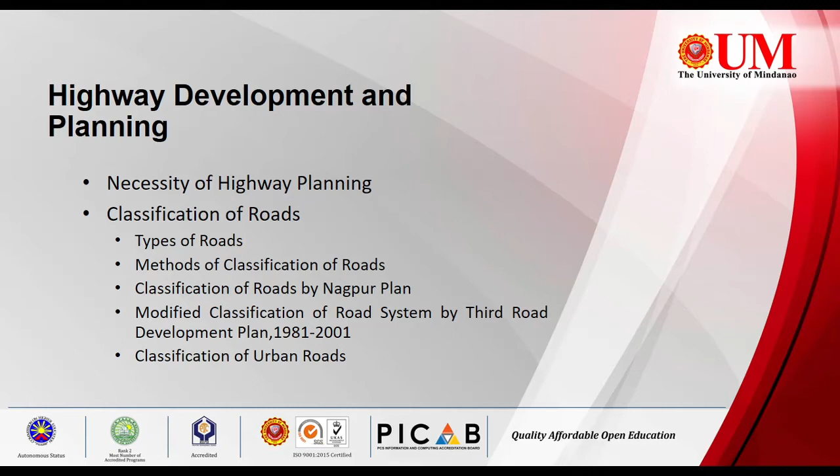So first, we'll be going to discuss necessity of highway planning. Highway planning is also a necessary component of highway construction. In today's era, planning is a needed requirement before making it into reality. Planning is necessary especially when the budget of certain projects is limited. This is the time that we are able to adjust the cost of the project and open it for any possible upgrades in the future.

So highway planning is necessary because every country is developing. Like here in the Philippines, there are places that are developing and highway planning is a must in order to prepare for the future. This just means that we need to prepare everything before making it into reality so that we can avoid unnecessary mistakes and failures in the construction of highways or roads.

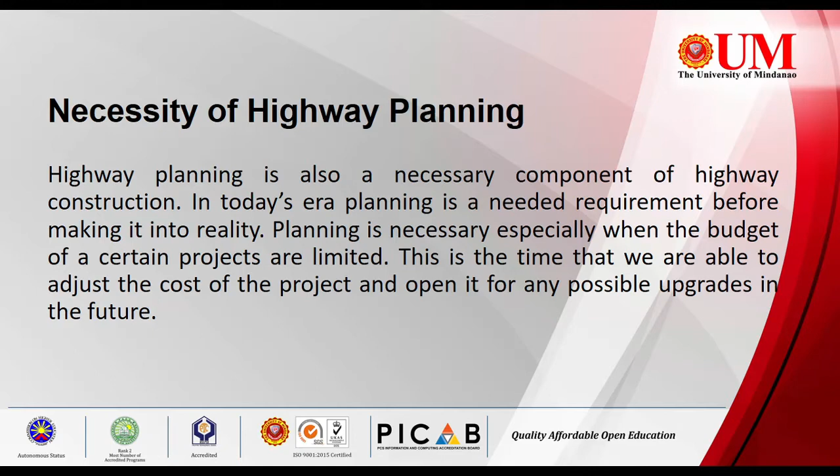We cannot deny the fact that there will always be mistakes in making roads, but with the help of highway planning, we can lessen them, especially when the budget is limited. Failures are also limited. So, in order to fulfill these objectives, highway planning has principles to be kept in mind. First, to design a road network that would allow for effective and safe traffic operation at a low cost. The expenses of pavement layer creation, maintenance, and replacement as well as vehicle operation costs must all be taken into account.

This just states that when we design a road network, we need to know everything that is affected by this network. That includes the cost of operation and how it will benefit the traffic. It also includes the expenses for future improvements and maintenance because as years go by, roads are prone to damage and there is a need to maintain them because they will be used by the public.

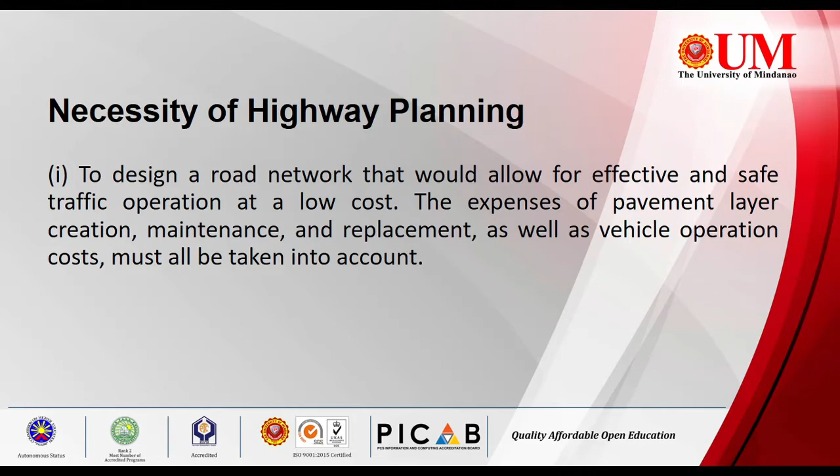Next is to determine the road system and lengths of various kinds of roads that would give the most utility and could be built within the planned period's available resources. This just states that there is a need to determine the roads and lengths of different roads in order to classify which would be needed to develop according to the plans that have been made, also dependent on the available resources.

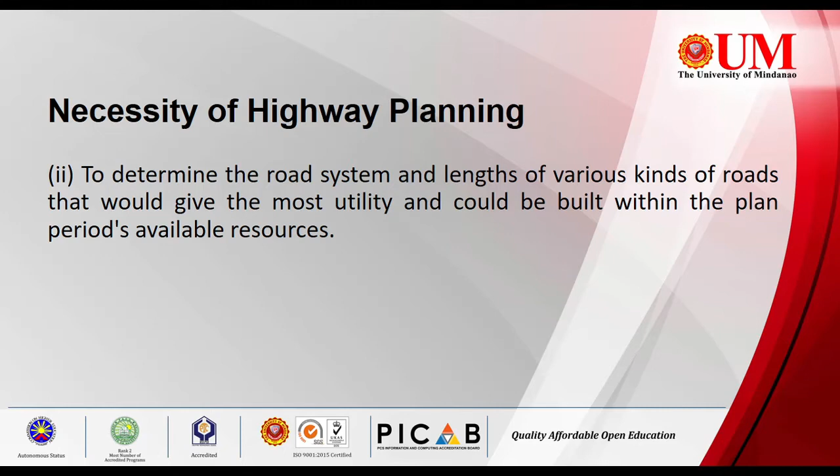Third is, for a given design era, planning for future development and projected traffic demands. This just states that future developments depend on what is already planned in terms of traffic demands, with proper adjustments also. We can see that there are a lot of areas that have been constructed before others. That is because the engineers who plan them take into account what could be the better solution in every situation of traffic demand. It will all depend on what is planned and what would benefit the many.

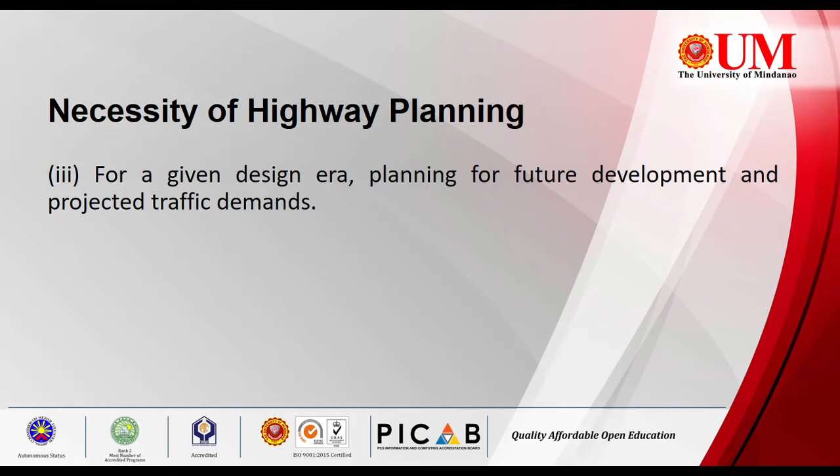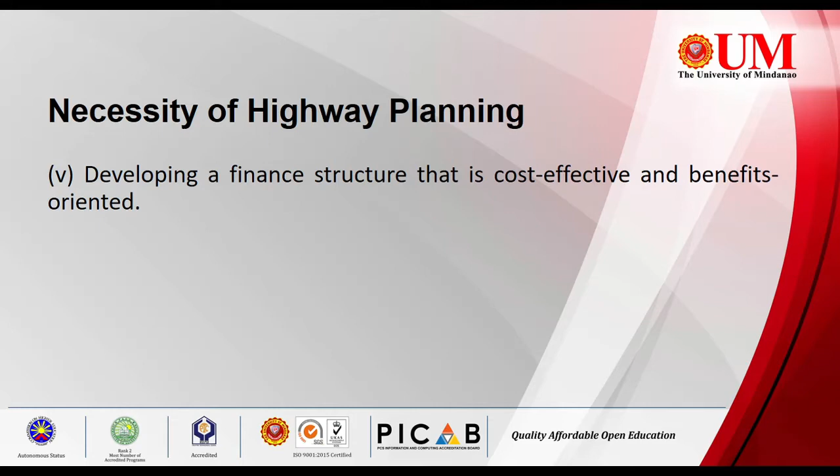Lastly would be developing a finance structure that is cost effective and benefits oriented. Like any other project, the cost of construction must be taken into consideration so that it is effective and benefits the public, because it would be for public use.

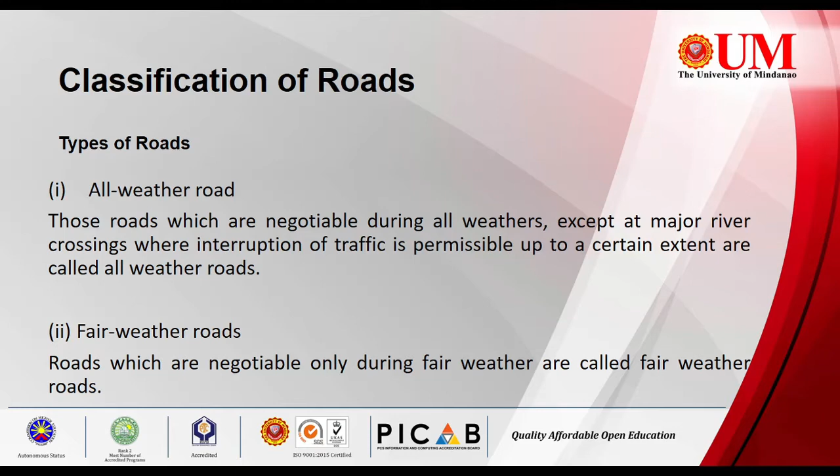The next topic would be types of roads. The different types of roads are classified into categories depending on whether they can be used during different seasons of the year. First is all-weather roads. Roads which are negotiable during all weathers, except at major river crossings where interruption of traffic is permissible up to a certain extent, are called all-weather roads. The other one would be fair weather roads. Roads which are negotiable only during fair weather are called fair weather roads.

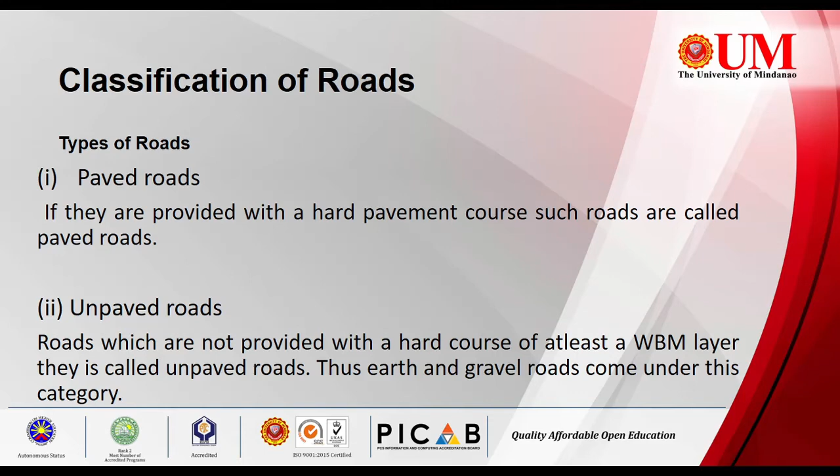Next, based on the type of carriageway or road pavement, roads are classified as paved roads and unpaved roads. Roads provided with a hard pavement course are called paved roads. Roads which are not provided with a hard course of at least a WBM layer are called unpaved roads. Thus, earth and gravel roads come under this category. Next, based on the type of pavement surfacing provided, the road types are divided into two as well.

These are surface roads and unsurfaced roads. Roads which are provided with a bituminous or cement concreting surface are called surface roads. Roads which are not provided with bituminous or cement concreting surface are called unsurfaced roads.

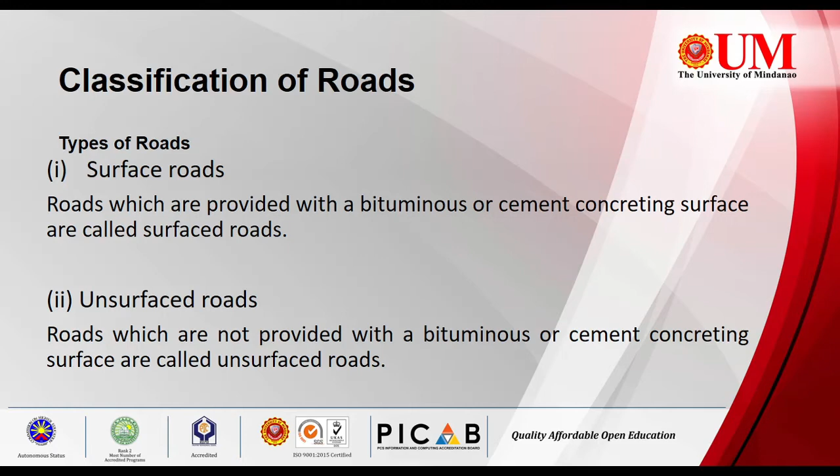Next would be methods of classification of roads. The roads will be generally classified on the following basis. So first would be traffic volume, next would be load transported or tonnage, and lastly would be location and function.

So first for the traffic volume, the types of roads are categorized by how many vehicles they have per day. So very heavy traffic roads are above 600, while the lowest would be light traffic roads below 70. So for load transported or tonnage, first very heavy traffic roads are above 1,524 per day, and the lowest would be 508 for the light traffic roads.

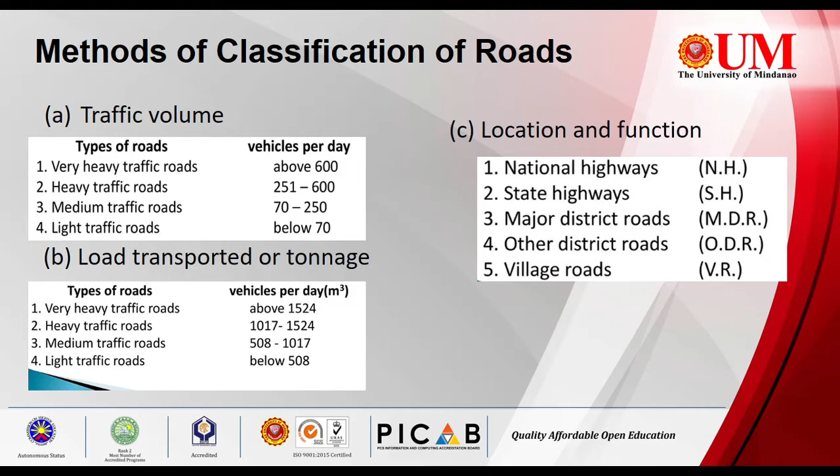So third, location and function. The classification based on location and function should be therefore a more acceptable classification for a country as they may be defined clearly. The Nagpur Road Plan classified roads in India based on location and function into the following five categories described. The first road development plan, or Nagpur Plan, was formulated in 1943.

Next is state highways. State highways are highways that connect with the national highways of neighboring states, district headquarters, and significant cities. State highways are usually roads that link important cities, towns, and district headquarters within the state and connect them to national highways or state highways of neighboring states.

Third would be major district roads or MDR. One of the most significant routes inside the area is the principal district roadways. It supports the manufacturing and market region by linking these locations to one another and to the main roadway. Major district roads are important roads within the district, serving areas of production and markets and connecting these with each other or with the main highways.

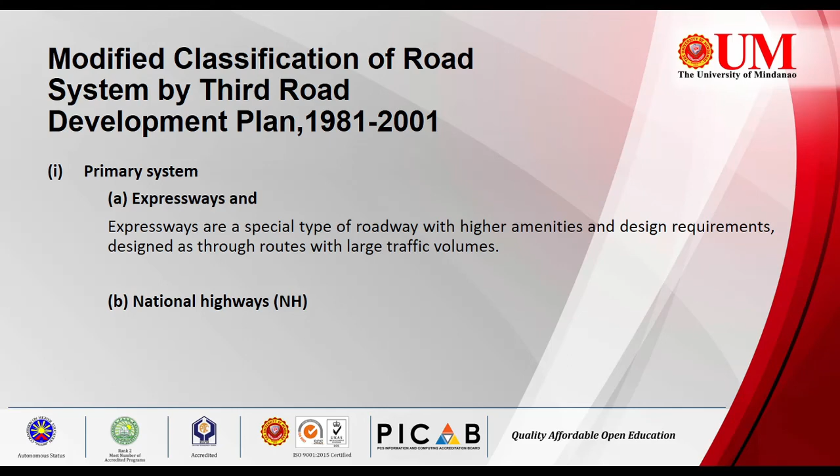So just like here in the Philippines, we have NLEX and SLEX expressways. They are superior type of highways and are designed for high speeds, high traffic volume, and safety. They are generally provided with grade separations at intersections, and parking, loading, and unloading of goods, and pedestrian traffic are not allowed in expressways. It only has entrance and exit. And the other one will be national highways, as I said earlier.

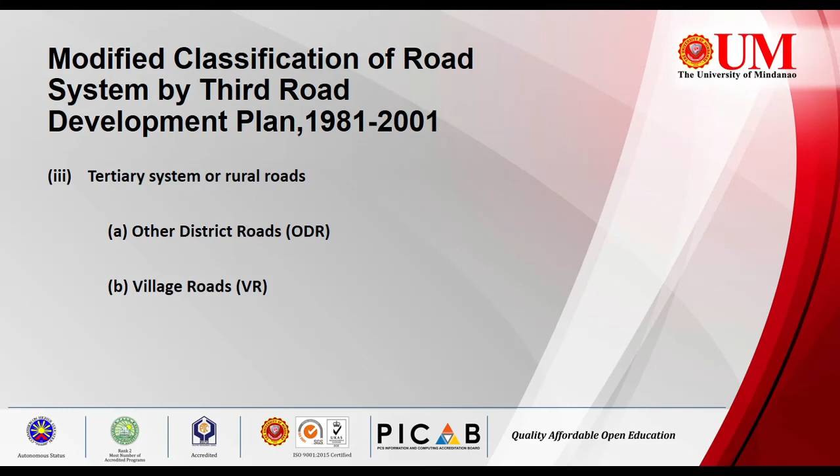Secondary systems are the state highways and major district roads. Tertiary systems or rural roads are the other district roads and village roads. So the last topic would be classification of urban roads. So first is arterial roads. So these are roads that are for the heavy and important traffic inside the city, usually along the expressway, serving as principal network of traffic flow.

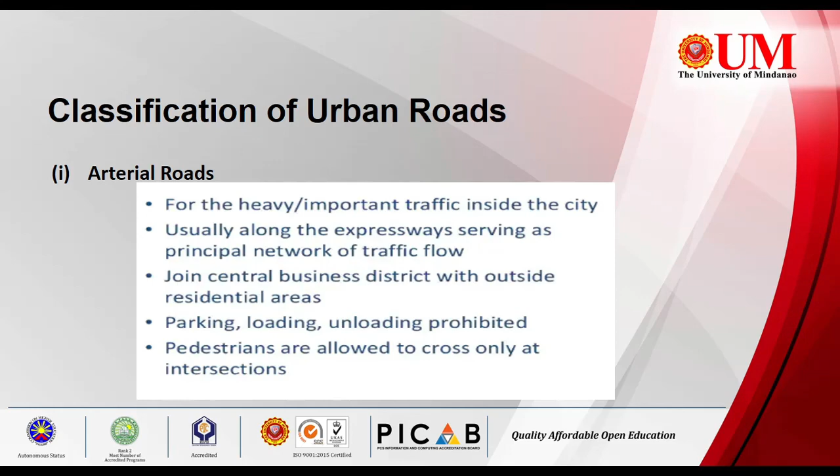Parking, loading, and unloading would be prohibited in these types of roads. Pedestrians are allowed to cross only at intersections. Next would be subarterial roads. Less traffic than arterial streets. Pedestrians are allowed to cross only at intersections as well, like the arterial roads. So spacing here varies from 0.5 kilometers in central business areas to 3 to 5 kilometers in residential areas. Parking, loading, and unloading usually restricted and controlled.

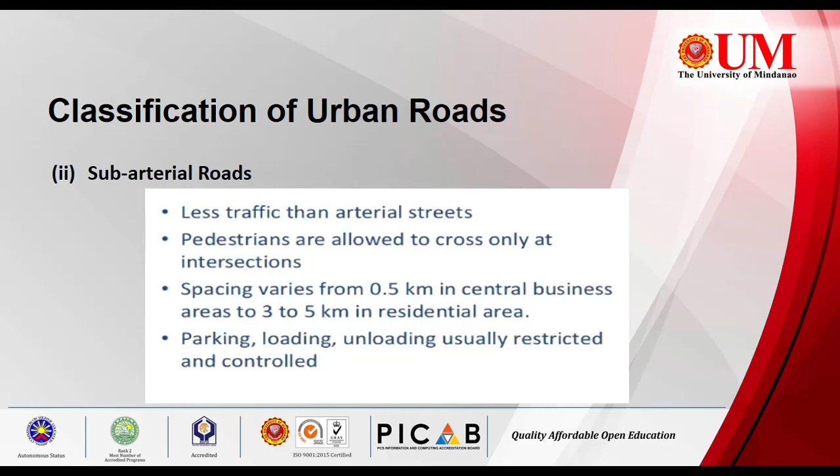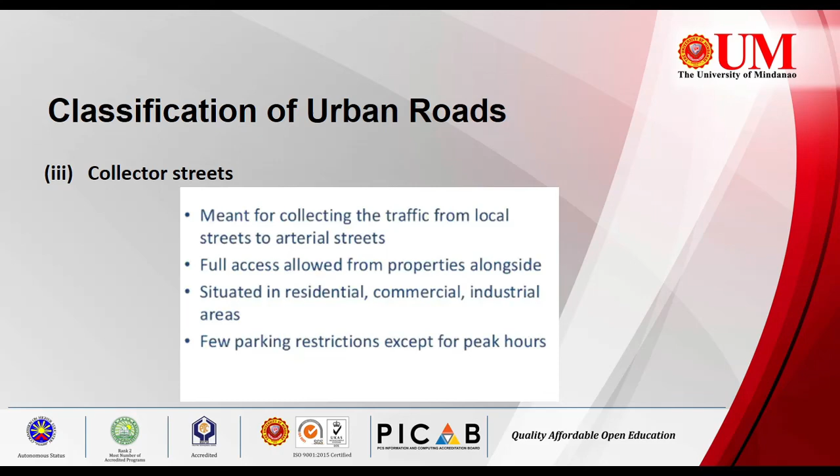Third is collector streets. These streets are meant for collecting the traffic from local streets to arterial streets. So full access allowed from properties alongside. Situated in residential, commercial, industrial areas. Then few parking restrictions except for peak hours. Local streets. These are open access from residents, business, or other properties. Does not carry large volumes of traffic, and unrestricted parking and pedestrians allowed.